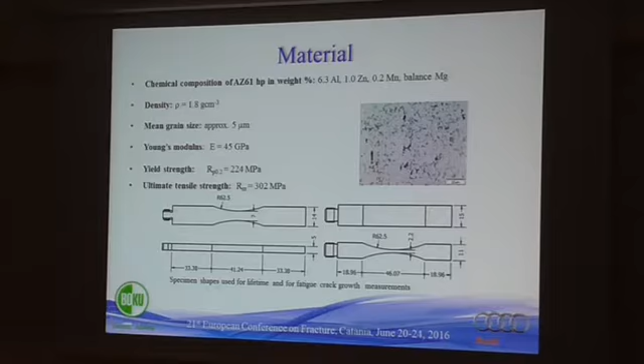In order to describe very high cycle fatigue properties, lifetime as well as fatigue crack growth measurements were performed, and the respective specimen shapes that were used you can see here. All tests were performed using ultrasonic fatigue testing equipment developed at BOKU with a testing frequency of approximately 20 kilohertz under fully reversed loading conditions. Testing environments were ambient air with an additional high vacuum of approximately 10 to the minus 5 millibar for fatigue crack growth measurements.

Sample preparation for fatigue crack growth rate measurements included a mirror-like finish and the introduction of a single edge notch of approximately 1 millimeter by electrical discharge machining in order to avoid any residual stresses. Fatigue crack growth was observed optically on the specimen surface, as you can see here.

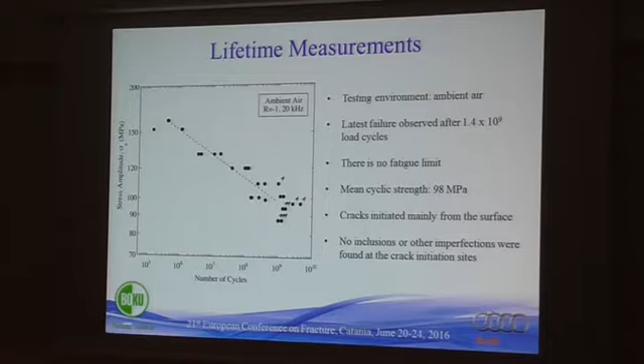So let me now present you the results of the lifetime measurements. As you can see, we still observe failure in the gigacycle regime. This means the material shows no fatigue limit. We have a single slope curve with no transition in failure mode. Cracks initiated mainly from the surface, with some rare exceptions where the crack initiated from the subsurface. And no inclusions or other imperfections were found at the crack initiation sites. So because of that, we assumed that the cracks might be initiated by slip bands.

And we took a closer look at the specimen surface. Please note this is the specimen surface, this is the fracture surface. And we indeed find some slip bands with even some micro cracks emanating from the slip bands. But still, we were not that sure if these slip bands were the result or the cause of the failure.

And considering slip in magnesium alloys, one has to take into account that slip systems are highly restricted due to the hexagonal close-packed crystal structure. And even more due to very high critical resolved shear stresses, there's only one possible slip system left at room temperature. And it has often been shown by many authors that conventional extruded magnesium alloys like the AZ61 are given a pronounced texture during the process, which results in the only possible slip system, the basal slip system, coming to lie parallel to the extrusion direction, which in our case is also parallel to the loading direction, which makes this slip system very unlikely to be activated.

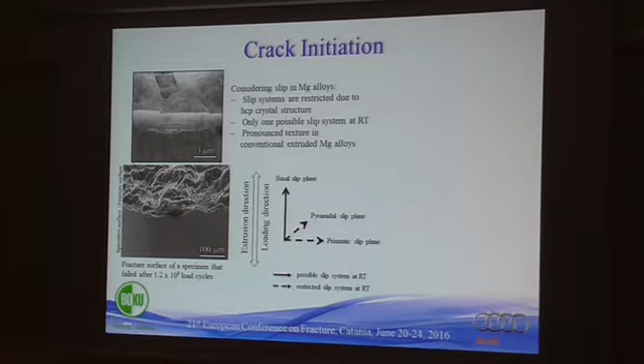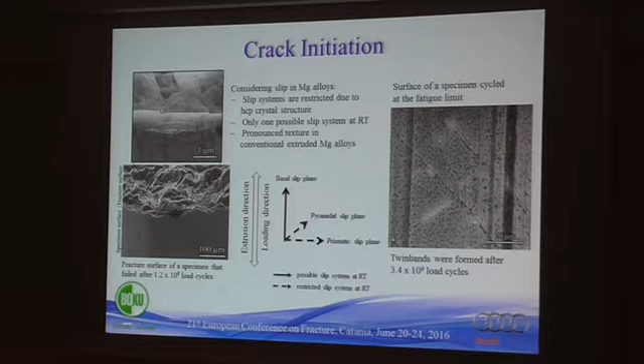So, but slip is not the only mechanism of cyclic deformation. There's also twinning, and indeed it has also often been shown that twinning plays an important role in magnesium alloys. We were also curious, and indeed we could observe these twin bands on the surface of a specimen cycled at the fatigue limit. And now this twinning, due to the reorientation of the crystal structure, can have a twofold effect. On the one hand, it can open new slip systems. On the other hand, it also can act as a barrier, causing dislocation pileup and subsequent local stress concentrations.

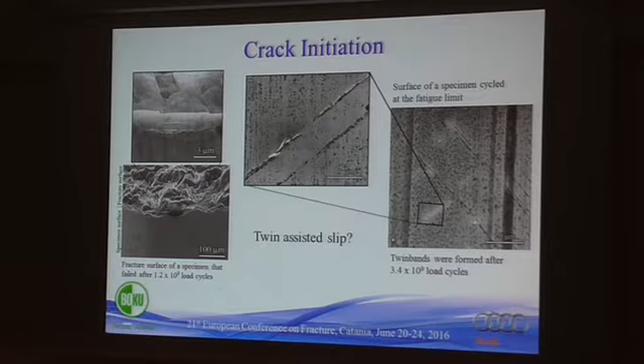So, if you take a closer look at one of these twin bands, you can see these micro cracks emanating from the twin band, and also this debris indicating slip. So, at the moment we cannot answer this question satisfyingly. We have found indications for slip, we have found indications for twinning, so at the moment we just might assume that the crack might be initiated by twin assistance. But we'd like to conduct further investigations on the subject.

Well, then I come to the results of the fatigue crack growth measurements. Crack propagation is plotted here with solid symbols for crack propagation in ambient air. Open symbols are crack propagation in vacuum. Due to very high testing frequency, ultrasonic fatigue testing is restricted to the near threshold regime.

And as you can see, the threshold stress intensity in ambient air is significantly reduced due to this plateau-like regime of almost constant crack growth in the range of 10 to the minus 9 meter per cycle. Also remarkable are these very low crack growth rates that can be observed in vacuum, which are below 1 Burgers vector per cycle.

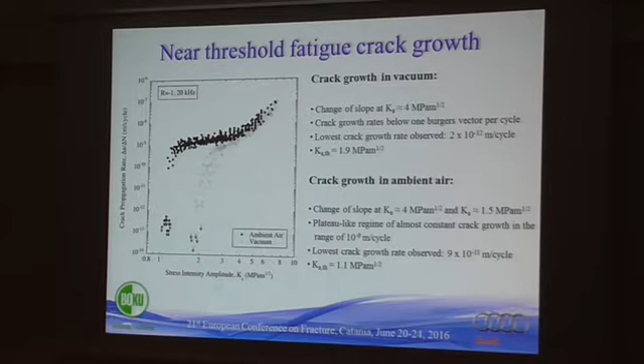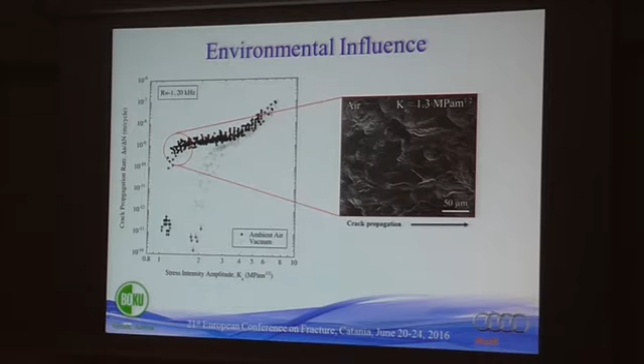So let me now conclude my talk and also give an outlook on the future plan. The very high cycle fatigue properties of wrought magnesium alloy AZ61 were investigated. The material shows no fatigue limit. The ratio of fatigue strength at 10 to the 9 loading cycles to ultimate tensile strength is 0.32, which is comparable to aluminum alloys. Crack initiation occurs mainly from the surface, probably from slip bands.

And we could show that environmental influences are effective even at ultrasonic frequencies. We found a pronounced reduction in the threshold stress intensity factor in ambient air compared to vacuum of about 42%. And fractographic investigations reveal a transition in fracture mode from ductile to quasi-cleavage, suggesting most likely hydrogen embrittlement to be the acting process.

So, the future plan: we'd like to conduct further fatigue crack growth rate measurements in dry air in order to answer the question whether it is hydrogen embrittlement or something else. And we would also like to further investigate the evolution of slip and/or twin bands and their effect on the crack initiation.